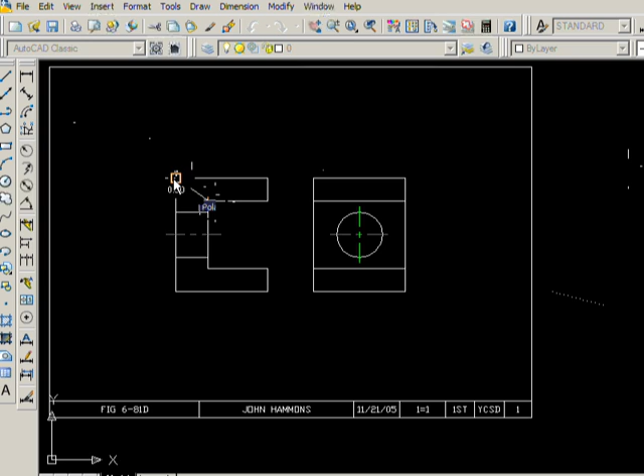Linear dimension tool, first of all, I need the distance from this corner, this width, so I'm going to click on this corner and pull it up. Notice I've got to put that on a dimension layer. Whether you dimension from the top or the bottom, you're still going to have an overlapping line there, so that's going to be acceptable.

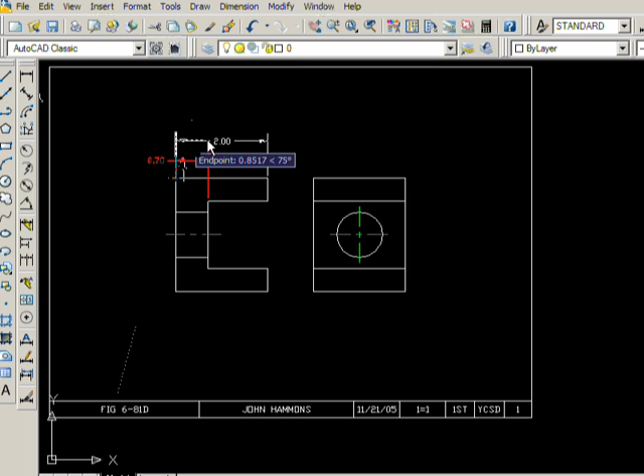We'll take it. And another linear dimension, we're going to click from here to here and pull it up. Again, I need to put it on the dimension layer. Let's go ahead and set that so I don't have to do it anymore.

I've got a dimension either this piece or this piece, and also the distance from here to here, and then finally my entire height. So I'm going to go ahead and dimension this distance, and finally this distance.

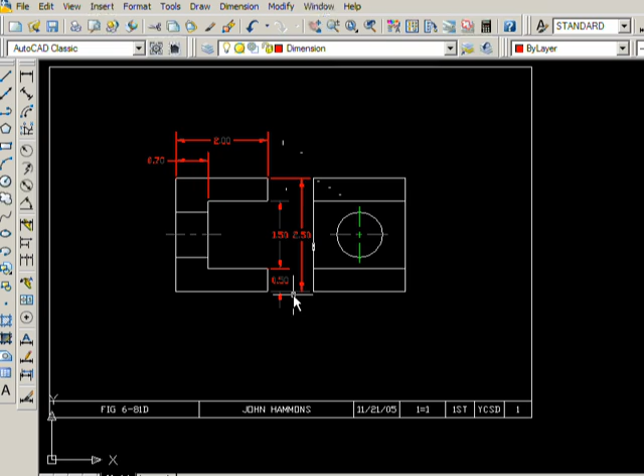Alright, I'm going to keep that whenever possible, always dimension in between the views. And moving right along, I've still got a few dimensions to do on this side.

I'm going to click the dimensioning tool. I need the distance from... I'm going to zoom in a little bit. And I'm going to maneuver this line straight down to about right there, because I'm going to have to dimension that center line.

I'm going to go from this edge, I'll turn on O-snap. I'm going to go from this edge to this line, and pull it up. I'm also going to have to pull this in the middle, make it centered.

Alright, the next one's going to be the outer width of this, which is 2 inches. I'm going to click here, and pull that up. I've got my smaller dimension inside my outer dimension.

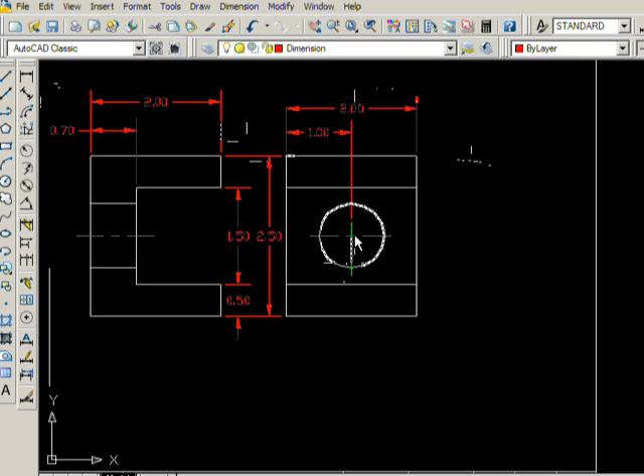And I've got 2 more dimensions to go. I need the distance from the center point to the bottom or the top. So I'm going to put these on the outside. I'm going to go from... also have to move this center line in some.

So now I'm going to click right here, right there, and pull it out. About 1.25. And lastly, I need a diameter dimension for my circle.

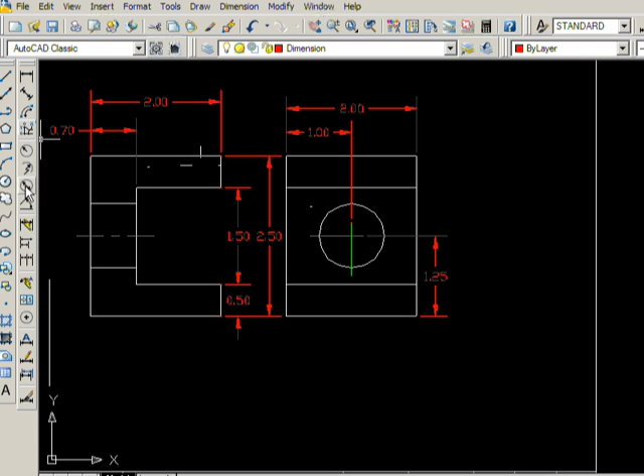So I'm just going to go ahead and click my diameter dimension tool. And I'm going to click right here. I'm just going to pull it down to the bottom, about right there.

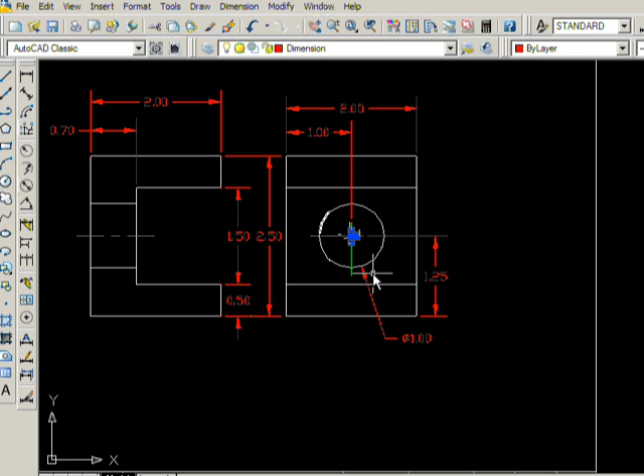Alright, last thing I need to do, I'm going to explode this. I'm going to go in, delete my red lines, and your finished drawing should look similar to what I have on mine.